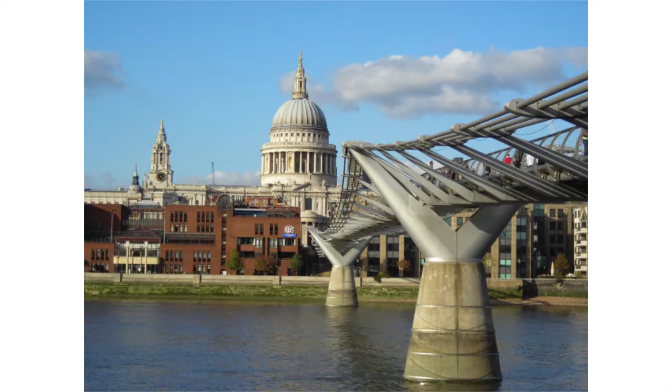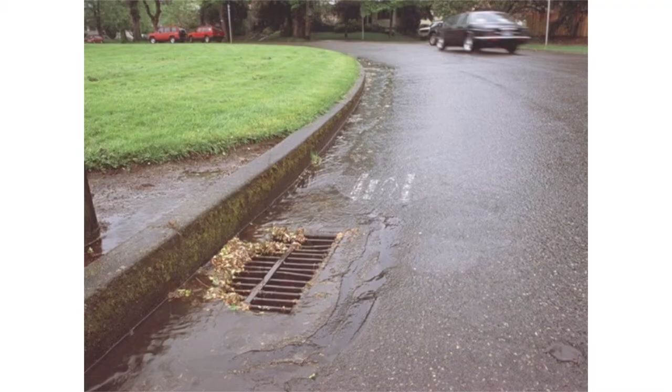So, as I say, at risk of telling you things you already know, our places are shaped by water. All of our towns and cities and most of our villages are in the places they are for some reason to do with water, whether that's because it's physically shaped the environment around them, or it was there for access to water, for transport, whatever it might be. But our relationship with water is changing, and we now have this problem where we keep trying to get rid of water as fast as we can.

And when we get rid of water as fast as we can, it picks up lots of nasties. We have more hard surfacing. It runs very fast into our sewer system. That is essentially the nuts and bolts of the problem we're facing. And when it runs so fast into those confined spaces, sometimes it has nowhere to go except come back out again. And when we're dealing with a combined stormwater system, that overflow is full of other nasty things that you probably don't want in and around where you're going to be living. So we want to be managing that as effectively as we can.

There are still around 20,000 combined sewer overflows in the UK. So if it doesn't come back out of the sewer, out of the stormwater grill, it comes out of the other end. We're taking pressure off, and you have all those nasties going back out into our natural environment. 27% of our water bodies aren't currently meeting Water Framework Directive water quality standards. So over a quarter of our water bodies are not as good as they should be, and we're going to be fined for that as a country.

And then there's obviously the other issue around flooding and managing flood risk, whatever form of flood risk that might be. We're seeing increased problems there. Obviously climate change is exacerbating a lot of these issues. So how can we hold some of that water back so it's not running so fast into our waterways, so it's not polluting our waterways so much, and we can keep a handle on our water resources?

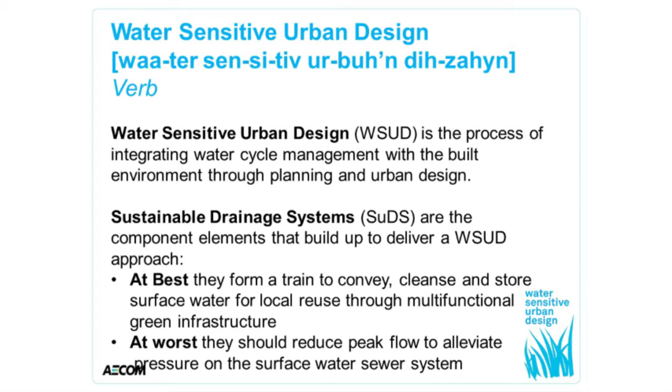We have a very separated, segregated water system at the moment. We have different supply to drainage to flood risk management. And I think it's that organisational complexity which is actually the crux of our problem. We know in this room, I think, how to solve all the problems. It's just perhaps an organisational issue of how we can all work together to do it. So water-sensitive urban design is this bigger picture of integrating water cycle management in the design and planning process.

And SuDS, they're the component parts that build up to give a water-sensitive place. There's a whole variety of different types of SuDS, and we'll come on to that in a moment. But at best, that whole system can be done in one location. So we can use a SuDS system or a SuDS train to convey, collect, clean, store, and put that water back into effective reuse in a very small space.

So somewhere like Northwest Cambridge is trying to do that. If you haven't seen that development, look it up. It's quite a good one. At worst, we should be putting SuDS in place just to slow down the flow of water and reduce some of the peak flows that are in our sewer system and take the pressure off there.

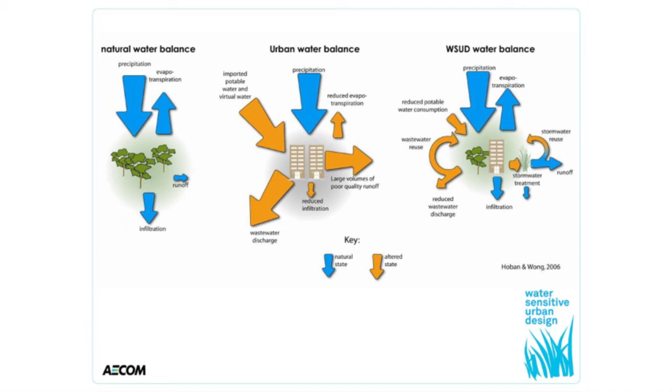So in essence, what we're trying to say is we're going to replicate a natural water balance process, replicating the natural water cycle, but in the complexities of an urban environment. So allowing for some level of infiltration, some level of attenuation and allowing it to evaporate back off, so it's not hitting the ground and running very fast off into our sewer system.

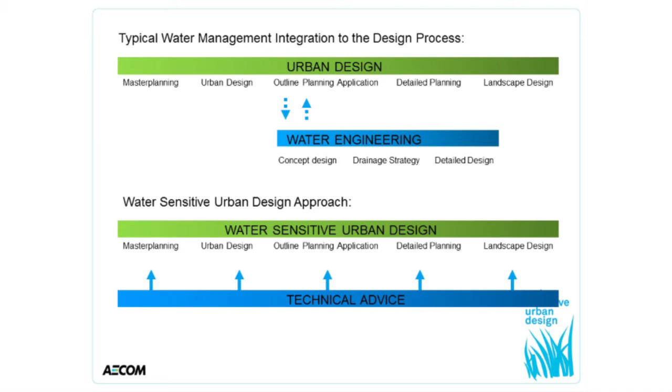When it comes to the process of when we engage with drainage as a development organisation or as a consultant, we tend to find that drainage is really only considered at an outline planning permission stage in the development life cycle, maybe even later. At this point, the GFAs for a development have already been sorted out. The layout of the development has generally been sorted out, and it's very difficult to shoehorn in different drainage aspects, particularly if drainage is not anything more than you need to be able to manage a certain level of flow. But we haven't really sorted out the methodology at that point.

So what we were thinking is Water Sensitive Urban Design tries to take that much higher up the design hierarchy, right in from the conceptual stages, to understand that water is really a fundamentally shaping element of a design process. It shouldn't be something that was thought of later in the day. If it's being thought of earlier in the design process, you need to engage a lot more different people in the process that you might not engage before. So it's not only the realm of the drainage engineers, but it has to be the architects, the landscape architects, the ecologists, and all the other people involved in the development process.

And that's where we come to the Southeast 7 master planning for SuDS guidance on that slide, which is entitled Water, People, Places, as is the title of this. And it really came out of a position a couple of years ago when we first started this process. So things were even more up in the air than they are now. But in any case, the National Planning Policy Framework says there should be a priority use for SuDS anyway. So in that sense, it should have always been a part of the planning process.

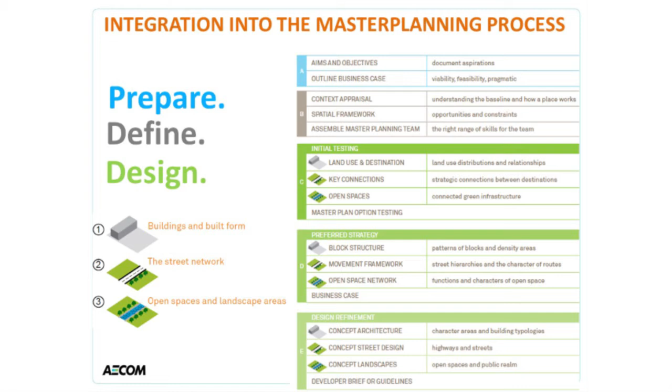And the framework was positioned through 3 conceptual levels: prepare, define and design. And then the design bit was split again into 3, around buildings and building plots, around the street network or movement network, and around open spaces. Essentially, the prepare element is really about setting your aims and objectives, understanding what you want to achieve on the site. Now, if SuDS standards were there at the time, then obviously there's something to work towards. If they're local ones, which you're going to hear more about later on, then those things can be put in place early on.

But crucially, you have to think about the broader business case for delivering SuDS. SuDS isn't just about delivering somewhere to manage your water, as the theme throughout my presentation is. It's about all those other things you can leverage from your SuDS network, whether that be open space, biodiversity, air quality improvements. The list of green infrastructure benefits is almost endless. So if you can make a link with other problems and create that bigger business case, it's much easier to convince earlier on.

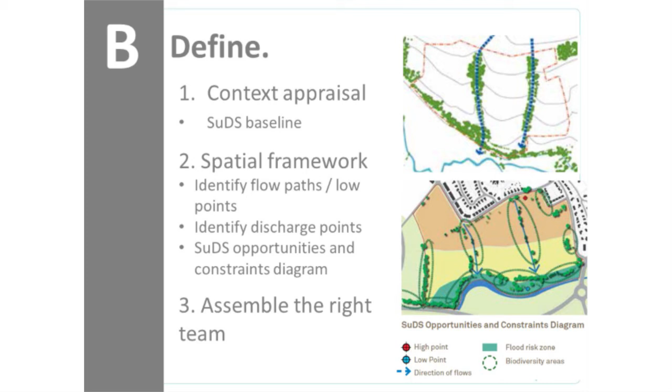And then you can start looking at the conceptual framework for water, so understanding what assets you've already got on site to make it work. Now, although this represents a big site in the picture, we actually did this for several different scales of site, right from a few houses on a mews street, right up to a large campus area, an industrial commercial area.

There are assets already on the site, so water bodies, drainage ditches, pieces of green space already that you can use as part of your toolkit. And from that, you can start building up your spatial framework of where you want your SuDS to work. So identifying your high points and your low points, the flow paths, the critical points, where you might discharge through the discharge hierarchy, trying to keep it on site for reuse if possible, and then going down the discharge hierarchy. And ultimately, assembling the right team at the right time to be able to think around the broad spectrum of issues.

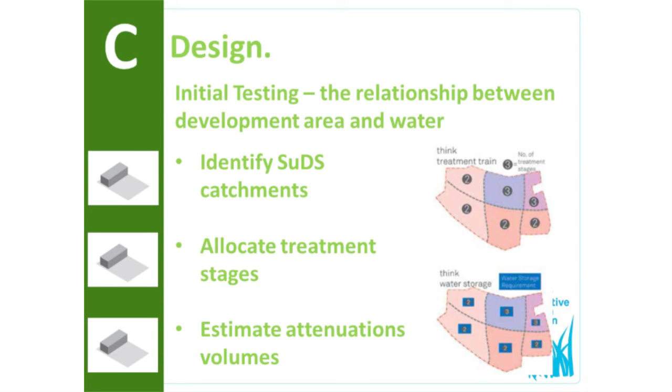Building up, if it is a large site, you might want to start thinking about how that breaks down into different catchment areas. So manage the catchments in their own areas. And this is starting to shape where you are going to put your development longer term, but we haven't even got to that point yet. So thinking about the different areas, thinking about if there's more contamination in one area, do you need a longer treatment train to be able to take some of the pollutants out? You can allocate your treatment stages, and you can also start to have high-level estimates of your attenuation volumes.

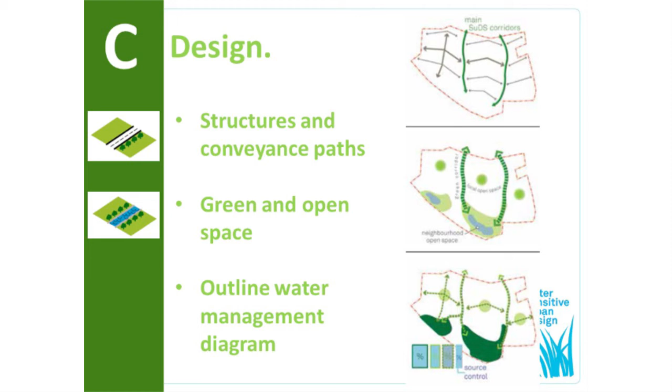But as you get into more detail, you start layering up the different elements that you want to see in a master plan. You can start to link your structures and your conveyance paths with other movement networks. So people movement and water movement often go hand in hand. Looking at where your open space and your green space is going to be, and if you can use those areas for storage and filtration. And ultimately, you can come up with a spatial diagram at the end of that, which you can then use as the building block for the development profile.

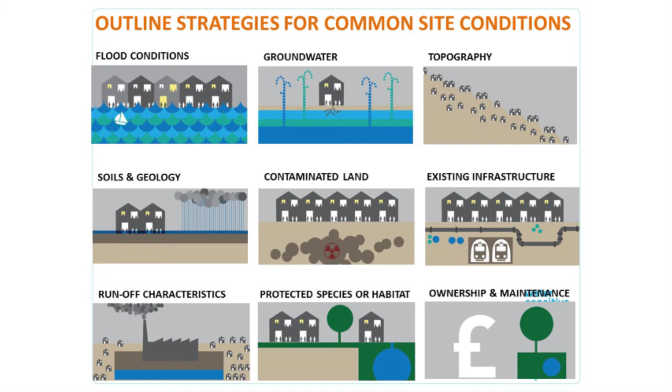But it always is about reflecting the local conditions, and obviously there are all sorts of ground conditions which you may face on a particular site. You may have several of these on one site. And so it's really important for us to be able to convey a message that there is a SuDS solution for just about every site that you might come across. Whether that be contaminated or really high groundwater levels, or a really constrained site, there will be something in your toolkit which you can start to utilize.

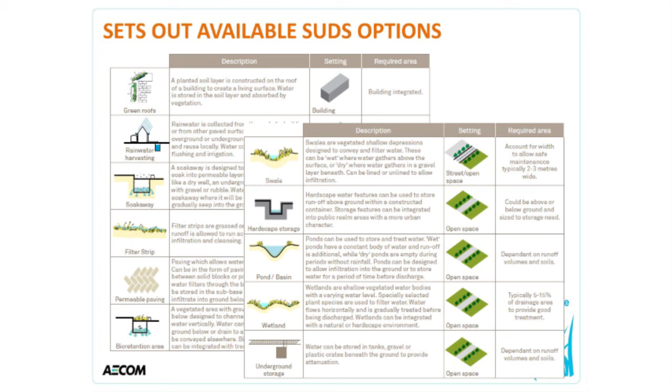And so we looked at lots and lots of different types of SuDS, and we said where you'd be able to put them, and we started coming up with some high-level rules of where they would be used and how they should be used. And gave this large matrix, if you like, which basically says if these are the conditions of your site, these are the SuDS that you might be able to use. And so you can very quickly say, right, this is in my toolkit to be able to use on this particular site, in this particular location, subcatchment that we've defined.

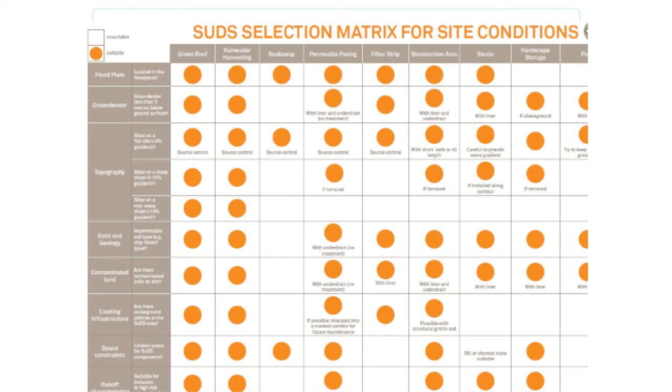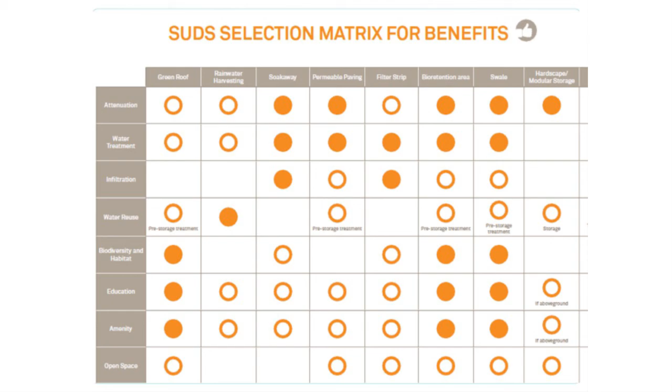But as I said earlier on, it's about leveraging those other benefits and seeing what other things you might be able to do other than just storing your water, if it's water quality, or then actually moving on to amenity space, open space, climate control, all those other things. So we made a similar matrix where we looked at the different types of activity you might be doing, the different types of SuDS that you might be utilizing to show the other benefits you might be able to achieve at the same time. So you've again got another element of your toolkit to be able to present to developers, saying actually you could do this biodiversity activity at the same time as you could be achieving your water quality benefits.

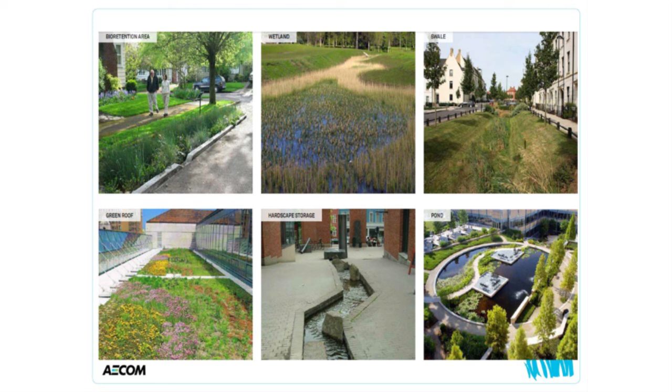And ultimately, it's about creating great places. And doing all those things together, you can start to have a high-level quality of design. Keeping water above ground means you have to spend more attention thinking about how it's going to look in the end. So a lot of the benefits you might be getting around amenity are through high quality, good design. And you can do that in a number of different ways, whether it be on the street or a very urban, hard environment, or on the rooftops, or a more rural environment. So there are lots of different situations where you might be able to apply SuDS. And I'll leave it there.